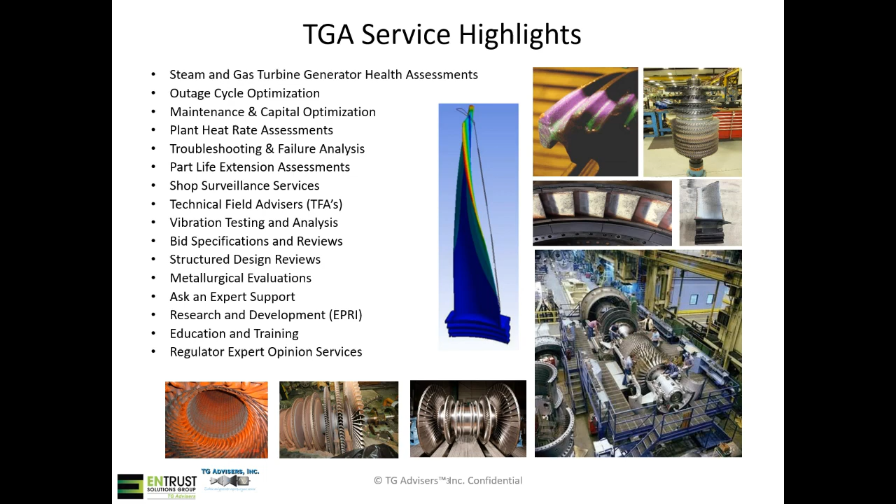All right, so now we're actually going to move into the startup optimization discussion. And really, I like to start with why optimize. First thing is we've had an influx of renewables over the last decade or more that has caused varying power demand and varying power prices throughout the day. So we've got wind turbines, solar, all types of other renewable sources that can be intermittent. So traditional generation sometimes has to respond to that demand.

Gas prices, natural gas prices have been fairly low over time here recently. So it is economical to run these combined cycle plants in many cases. But we do sometimes have oversaturated supply versus demand. So there's benefits to being able to cycle either down in load of these assets or to actually cycle them on and off. So we don't see a ton of baseload assets. I mean, you still see the nuclear steam turbines that pretty much come up to rated power and stay there, although there is some discussion on load cycling there as well.

But we do have quite a bit of variety of age of assets out in the market. And what you have is some of these older steam turbines competing, whether they've just been around since the 50s, 60s, 70s, 80s, even with these newer combined cycle units. You also have some units that have been repowered from conventional boilers to combined cycle arrangements. So some of the steam turbines still operating are from the 50s or 60s, and they're being forced to compete in competitive markets with plants that were more designed for cycling and are much newer. So we've got to somehow be competitive, but also make sure that the equipment is safe.

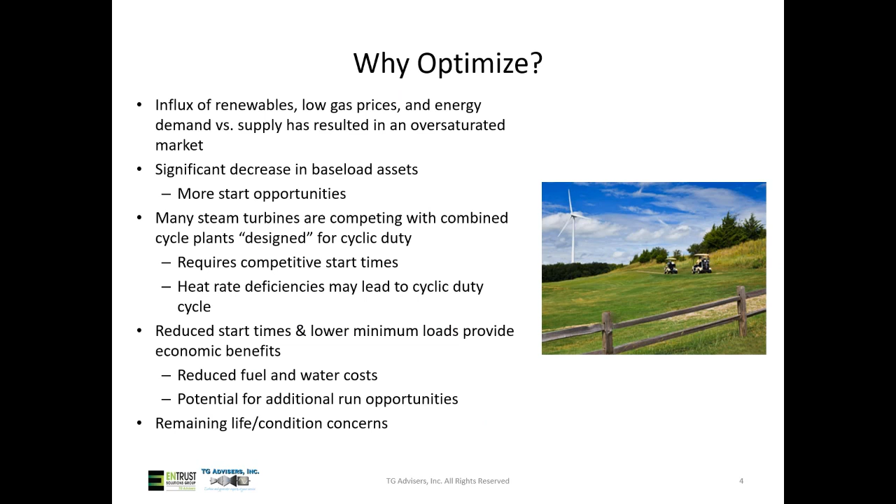All right, so we'll start with technical considerations. Really, the purpose of this section of the webinar is that when you go back and look at your steam turbine startup process, you'll start to understand a lot of the why behind some of the requirements that you adhere to through that process.

So let's start with what failure modes we're concerned with. When we're cycling on-off, we're going from basically no speed up to rated speed, which often is 3,600 RPM in the US. Nuclear could be 1,800 RPM, or any speed if you have a geared drive. The point is, you're going from standstill up to speed, and eventually back down to standstill. So anything that rotates experiences a significant stress cycle, and you can only do so many of those before a crack would initiate.

The second thing happening is we're going from cold or lower temperatures to a very high temperature. So we also have thermal stresses for all parts, whether rotating or stationary. Doing this a number of times eventually leads to what we call low cycle fatigue cracking - cracks forming in rotors, blades, casings, generator components, you name it. They're all exposed to stresses. We can also see stuff like solid particle erosion - particles kicked up from the boiler or HRSG when cycling, sent through the inlet of the steam turbine, causing solid particle impact damage that wears away surfaces over time.

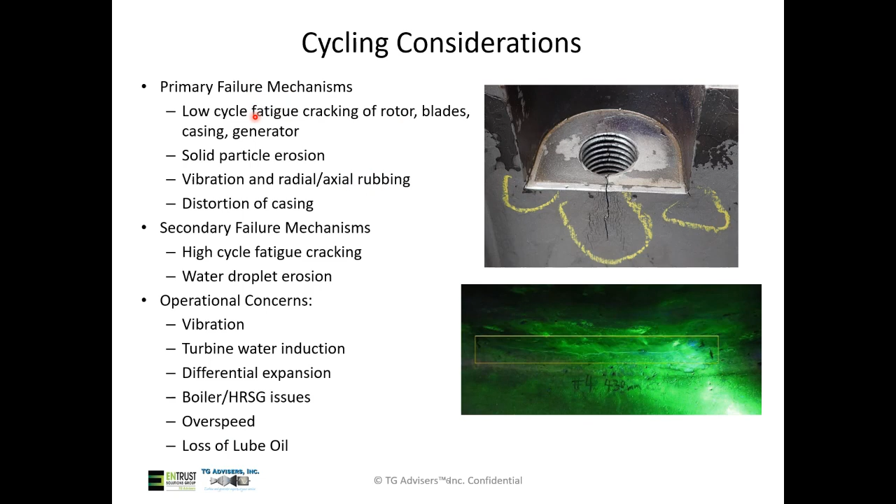I alluded to earlier that we have quite a bit of differences, quite a variety of steam turbines still out there operating. I'm going to put them today into two categories, the first being vintage. We've got to be very careful with these vintage units still operating because they're nearing their design life. For the high pressure, high temperature rotors, that may mean creep or embrittlement concerns, solid particle erosion. We may have a rotor bow that's developed, and casing cracking. For the low pressure turbine, typically what we're worried about is stress corrosion cracking or water droplet erosion. So these are failure modes likely present that we're having to manage in that vintage unit.

They're also typically less modern designs. Most of the rotors have a bore down the center. Essentially, after the forging process, you would come back and bore out or machine out the centerline of the rotor to remove impurities.

However, having a hole in the center of your rotor increases the stresses, so we got to be very careful with those bored rotors. You've probably heard of boresonic inspections in the past, which we do on a routine basis to look for flaws on that bore surface or subsurface and to track the growth over time to make sure that we don't have any flaws of concern.

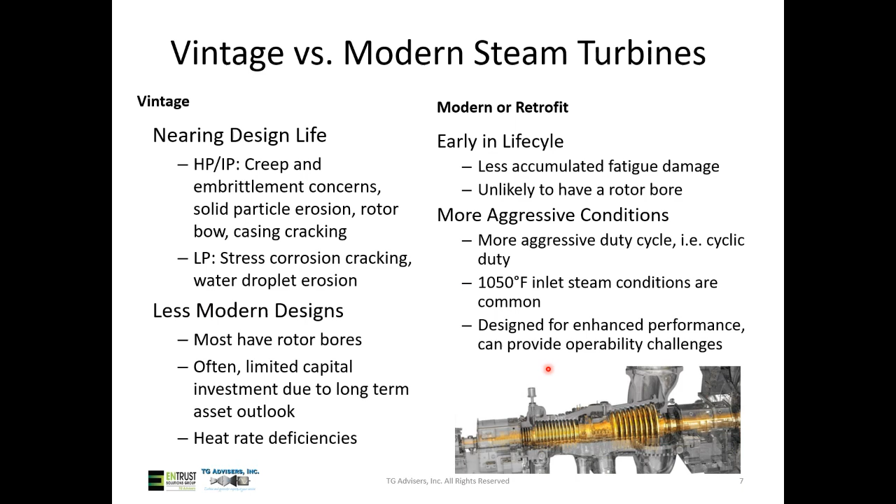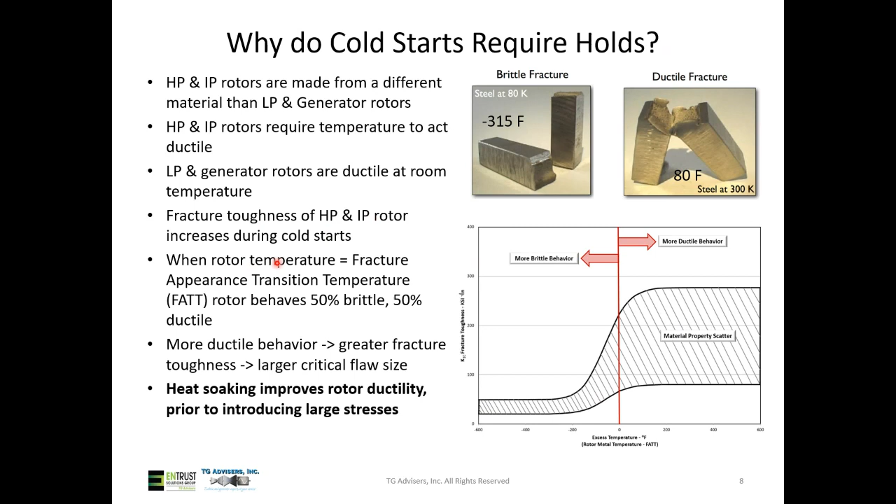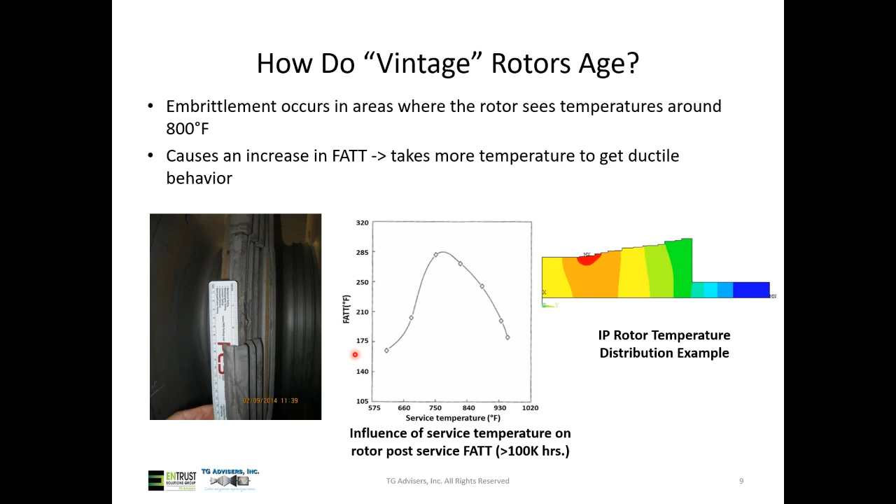The reason for that is, on most units, the last stage or the last couple stages of low pressure turbine blades are tuned. What that means is that we selectively control the mass and the stiffness such that their natural frequencies, the frequencies they're going to vibrate at, do not correlate to a multiple of running speed. If we have a blade vibration frequency that's equal to a multiple of running speed, the blade is going to fail rather quickly from high cycle fatigue.

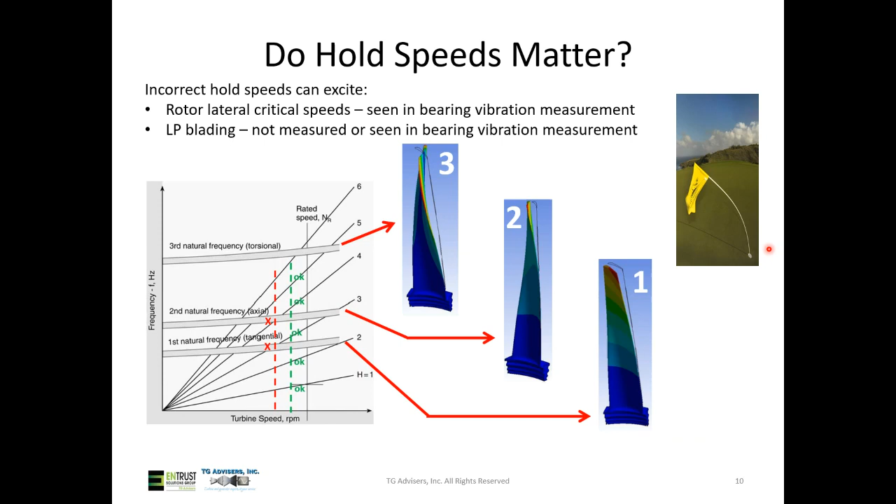Another important thing on steam turbine startups is steam to metal mismatch. Essentially, this is the difference in temperature between the steam and the metal temperatures in the unit. As you can imagine, the higher the difference, the more thermal stress occurs, because it's like taking something cold and pouring hot water into it. It's a significant stress cycle.

Another way to look at it: if you've ever taken a hot glass pan out of the oven and put cold water on it, it would just shatter. So we want to keep the steam to metal mismatch low to keep thermal stresses low. But if we don't have any mismatch, then we don't get any heating. So the higher the mismatch, the quicker it heats, but the more stress. We have to manage these things.

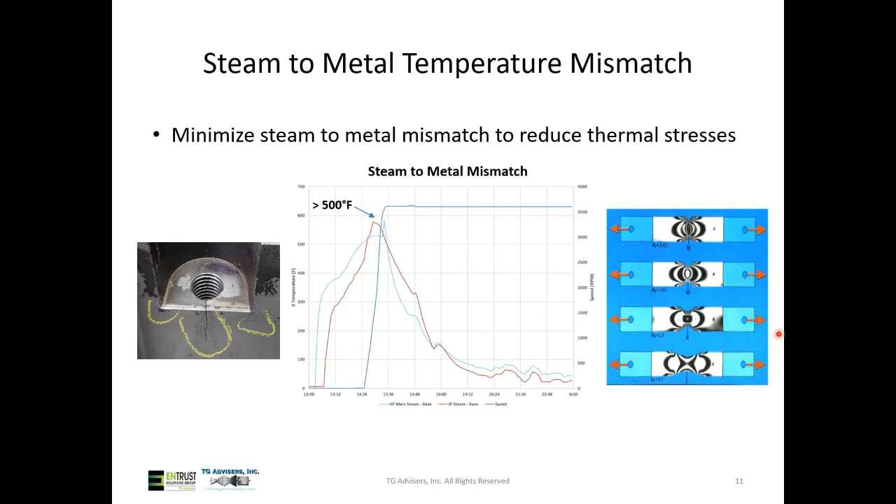We also have to be worried about clearances. So when you're going through an outage, sometimes there's a desire to make clearances very tight, particularly radial clearances, to try and get as much performance as possible and limit leakage in areas that don't contribute to power production.

However, that can present significant challenges with cycling. We want to be able to be flexible and start the unit quick, and if we put these tight clearances in coming out of an outage, we may not be able to start the unit because we're getting significant rubbing, or we may eventually rub out the seals or damage them and be right back where we were previously. So you certainly want to consider your approach in setting seal clearances in a unit that cycles.

That's one thing - axial clearance. We're going to have differential expansion because everything heats up differently. Rotor, casing, rotor length is also impacted by heat, but it's also impacted by speed. So a lot of stuff going on. We don't want things to touch that aren't supposed to - metal on metal can create quite a bit of damage. So making sure we have sufficient clearances is important for cycling.

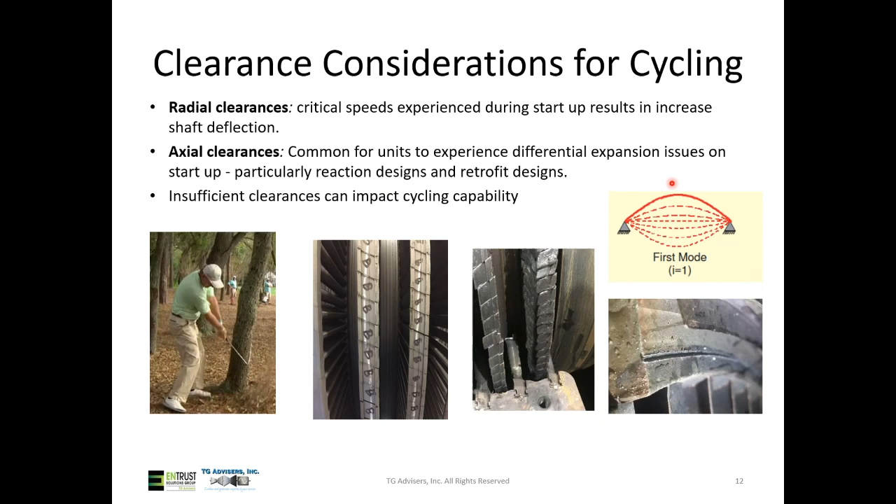All right, so now moving a little bit more into startup parameters, and it's quite a bit going on. Why there's a lot of issues during this time is that there is so much going on and everything's changing. A lot of steam turbine startups are still manual or semi-manual. Some cases they're automated. Gas turbine startups tend to be more of a push button.

So what are some of the stuff we're looking at just to be able to roll the turbine? We're looking at superheat requirements. We want to make sure that the steam is superheated enough such that we don't get wet steam in areas that we don't want it.

We need to make sure that our steam lines, piping leading up to the turbine is warmed up. We're going to look at rotor eccentricity to make sure that the shaft has all the temporary wobble out of it, such that we don't get too high of vibrations when we run it up. We're going to look at lube oil temperatures as well, to make sure that the oil is warm enough such that we get good vibration dampening from the bearings and the oil film.

We're also going to look at LP condenser vacuum levels to make sure that we have appropriate vacuum levels to bring the unit up. We have to be very careful with vacuum levels throughout startup to prevent potential blade vibration issues in the LP, low pressure turbine.

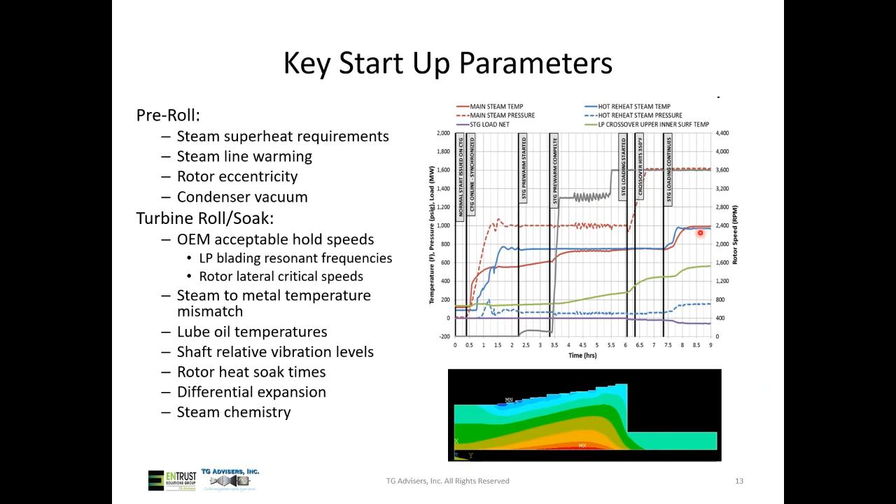So phase two goes from rolling off gear up until we put some load on the machine. And then the third phase is loading of the machine, going from closing the breaker up to eventually the dispatch megawatts.

All right, so I think most of you joined this webinar to understand what you can do differently. So a couple things I want to highlight here, or some of the opportunities. I look at this where we have a lot of different knobs and buttons, and depending on the unit, we do different things. So the first thing is we can change steam conditions potentially, temperatures and pressures.

So we can reduce the roll temperature, which has a benefit for thermal stresses. We're going to have lower steam to metal mismatch, but we do need to make sure that the steam is still hot enough to provide rotor heating.

We can look at putting steam into the unit quicker, which is going to shorten our startup process and get us rolling faster. We just need to make sure that, again, we have good superheat such that we're not putting moisture into the unit where it's not designed to have moisture.

If you've got a steam seal system or an auxiliary source of steam, you can use that to preheat the rotor. I'll show you some examples, both analytical and in practice, of the benefit of that. So we found, if you're in a day ahead market, you're going to be called and you have the ability to put those steam seals on, go ahead and do it. It gives you some free heating and allows you to make the startup a little bit quicker and safer.

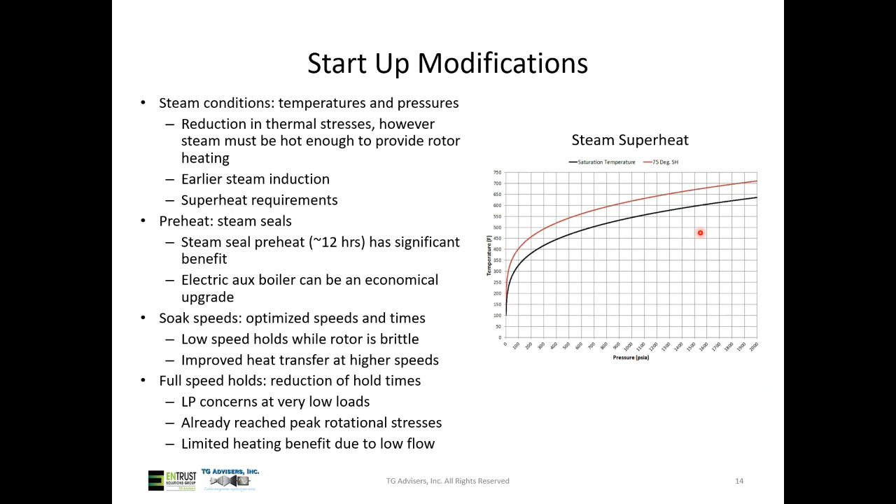So I mentioned the steam seals. Here's an intermediate pressure rotor, and what's interesting is here's the inlet, right? And then here's the exhaust and the gland or the steam seal area. So what's interesting is that the slowest part and the limiting part of the rotor to heat up is going to be this back end typically, because the steam is coming through the inlet and it drops temperature, drops pressure by the time you get back here.

This is also the thickest part of the rotor, so it's going to heat the slowest. Well, if I can put those steam seals on in advance, it's essentially putting some heat to the back end of the rotor, and that's going to start to conduct through and give you some heating benefit from the back end first, which is the part that heats the slowest when I actually start rolling up the unit. So it's a good way to cheat and get some free heating in advance of actually rolling.

So what we're showing over here is just some modeling, and the biggest benefit is at stage 7, the back end. Limited benefit kind of up front, but that's okay because that's going to heat the quickest once we actually admit steam to the unit. So if you're on a day ahead market and have an aux source of steam, go ahead and put the steam seals on. Typically 350 to 400 degrees Fahrenheit is kind of the temperature range that we see, but we've seen lower, we've seen higher.

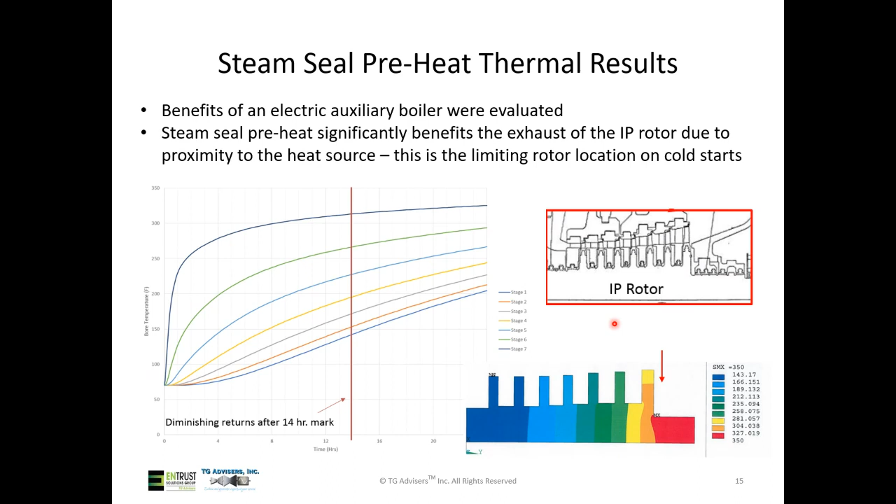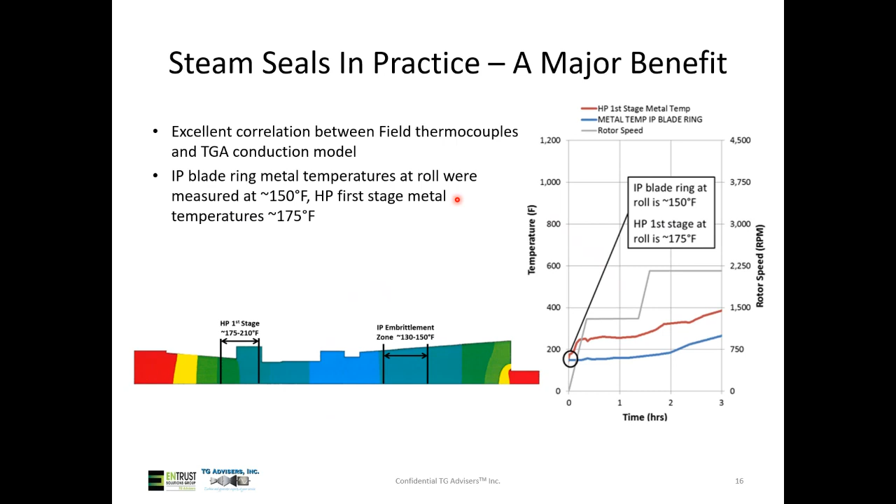So when we start to look at the startup, now we're getting more into the actual evaluation part. These are the things you want to look at and understand. First thing is operating hours and starts. What have we accumulated? It tells us how many failure modes we're probably dealing with at this point and how far they may have progressed. Are we close to the end of life or do we have a lot of life left?

We'll look at historical outage reports, specifically the non-destructive evaluations. If you have a bore, you want to understand the bore condition. Ultimately, what you do is something called fracture mechanics calculations, looking at the flaws that exist and what a critical flaw size would be, and then you can calculate how many times you can cycle it to grow that existing flaw to a size of concern.

If you don't have a bore, you may have a peripheral UT where they look from the outer surfaces inwards, again, to look for flaws internal to the rotor.

We can develop a good finite element analysis model, which allows us, with your operational data, to calculate rotor temperatures throughout all of startup, and rotor stresses throughout startup as well. From those, combined with knowledge of material properties and behavior, we can calculate critical crack sizes throughout startup. This allows us to understand how conservative or anti-conservative a startup is, and it allows you to set a baseline so that when you modify things, you can quantify the improvement.

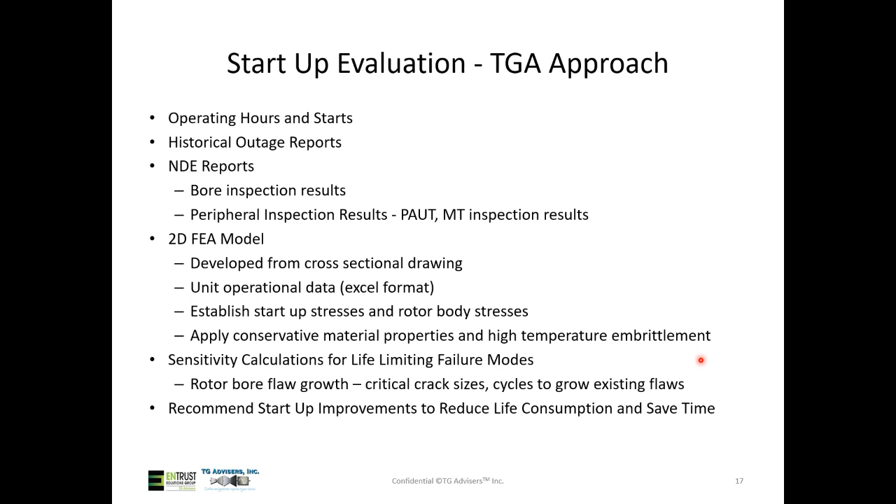We call it PI data, because that's what most folks use, but operational data is exported from a real turbine startup from your unit. We make a finite element analysis model of the rotor and simulate the startup on the computer. We can simulate changes, and what we're looking at is stresses throughout startup, particularly on that center line or bore surface, and temperature throughout startup. With temperature, we can figure out material properties throughout startup.

Remember, one of the first things I said is that the material properties for the high temperature rotors change throughout the startup. It starts brittle and transitions to ductile behavior. So we've got to incorporate that knowledge as well.

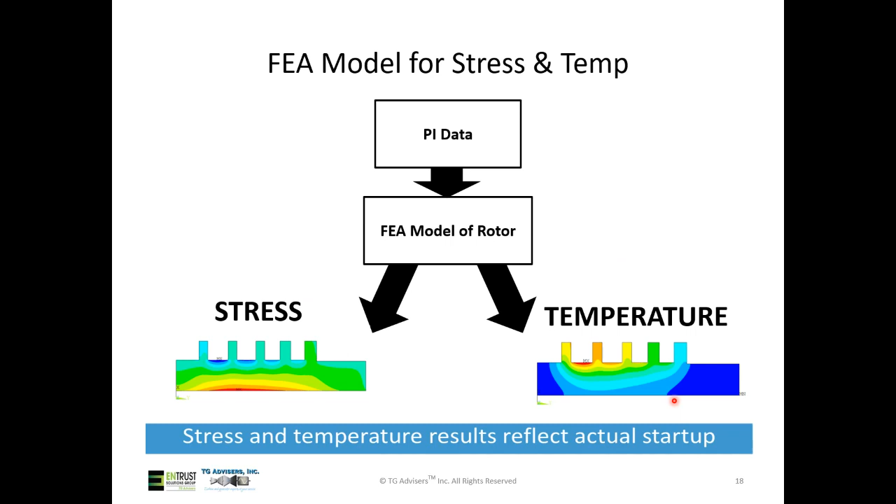Here's an example of an HPIP retrofit optimization. Really, the takeaway on this one is going to be the pre-warm period.

Depending on the OEM and depending on the vintage, you may have a process called pre-warm by pressurization, or pre-warming. What this does is pulse in steam. We can't just admit significant steam into the casing because then the turbine's going to roll off gear. So we just pulse steam in and get this slow, gradual heating over time.

The problem is if you follow this process to the T, you often end up with a very slow process. In this case, they had to get to 350 degrees first stage HP metal temperature, and it took roughly 10 hours of this steam pulsing to get there. So when you look at it, if you cut off this final 4 hours, the difference is only 50 degrees of benefit. So you get diminishing returns with time.

If we were to roll up to a low speed hold, we would get better heat transfer, a little better flow, and a little bit quicker heating. So there's ways to modify that and cut back on the time without compromising the safety of the unit.

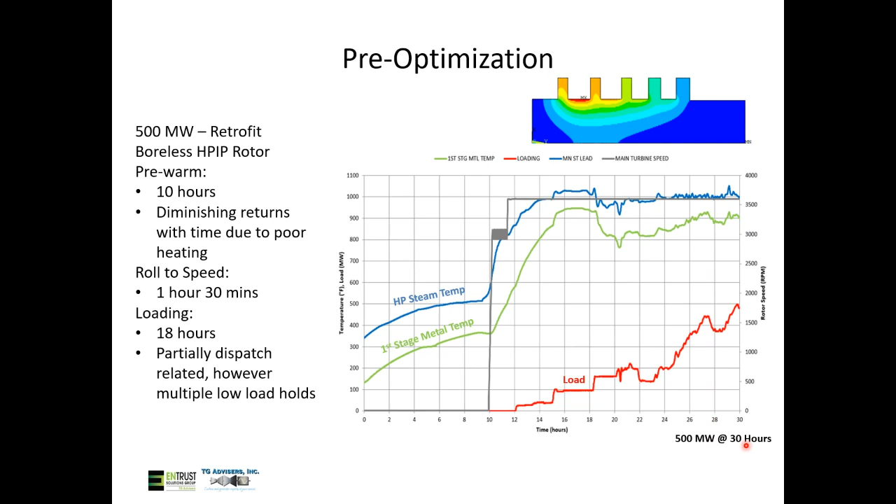But again, some of it was driven by dispatch requirements. So even if you look at it 20 hours versus 10 hours, it's still a significant savings. And we haven't compromised the unit in any manner.

All right, let's talk a little bit on vintage optimization. I think this is wrapping us up here as our last case study. Just some pictures I grabbed from the web.

This is more of a vintage unit here, high temperature, and then low temperature, transitioning into low temperature. Here we're showing some borosonic equipment and some visual indications on a rotor bore.

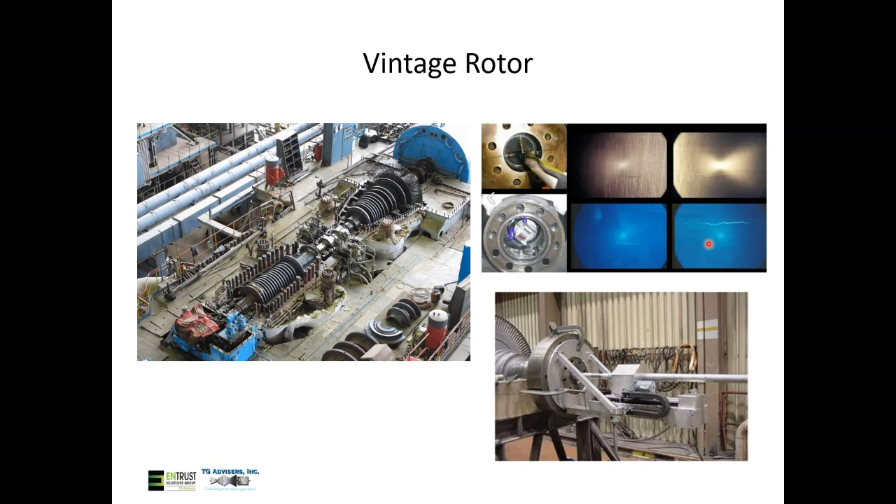Again, that's the surface that was cut out on the center line of the rotor following the forging process. Sometimes you'll even see a bottle bore if you look at your bore diameters, because there might have been a flaw like you see in these pictures, and then they would have come in and machined that out, and it ends up increasing the diameter of the bore in a section, which we call a bottle bore.

So I know these plots have a lot going on, so let's take a minute and explain them. These are coming out of our rotor models for optimization. So what we're looking at

here is stresses at the bore. So if you look up here in this top corner, it's the stress at the bore below each blade stage. So stage 9 is basically right here, 10, 11, 12, 13.

So using this finite element analysis and the steam conditions, steam temperatures, pressures, and speed ramp rates, I can simulate the startup. And what you see is with this startup, if you follow the speed, it comes up to 3,000 RPM. It wobulates. For those that know the various startups, you probably know which OEM this is. But then it goes up from 3,000 RPM right up to 3,600 RPM and starts making power.

Low load hold, and then picks up load eventually. So my question is why are stresses peaking so early on? And then you notice they're coming down, even holding at relatively constant speed. The answer to this is that we have two things happening at once.

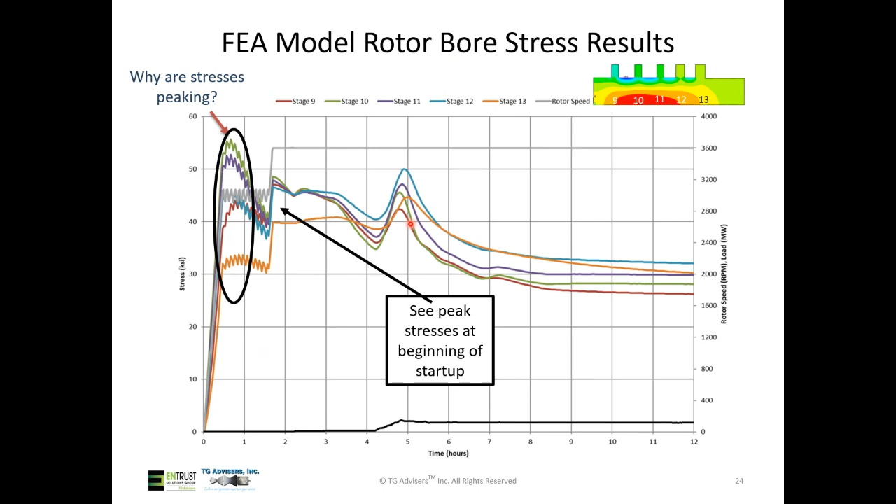Although I had that stress peak again around 5 hours, I have much larger critical crack sizes at that point. So I'm not at risk for failure at that point, which is why we don't like to spend a lot of time at that low speed hold, because if I was going to have an issue, it would have happened here.

So you learned a lot during this webinar, and the question is, what can I do to improve things? I know it's not easy to answer, so I'll give you the answer: I can add a low speed hold. What that does is allow me to sit for a period of time at a lower rotational stress, because stress is a function of speed squared.

So now I'm sitting at 1,000 instead of 3,000. During that sitting at that low speed hold, two things are going to happen. First, my steam to metal mismatch is going to come down, which lowers my thermal stress. Second, my rotor temperatures are going to improve, which improves my rotor ductility or material properties.

So adding this half-hour hold at 1,000 RPM took my limiting critical from 0.2 inches up to about half an inch. Significant improvement with that little tweak, and something that your startups, particularly for older units, come with. One startup probably looks pretty similar for like a 1950s unit up to like the newer combined cycles without bores.

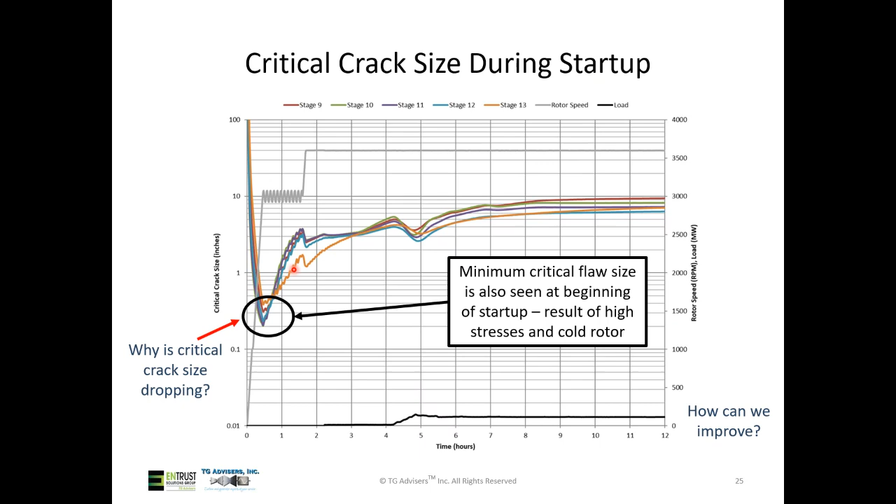So the science has improved, the understanding of fracture mechanics - that didn't even come out until like the 80s, so it wasn't around when a lot of these startup processes were developed. And the understanding of how rotors age has also improved with time. I think this is a great example of how adding a small hold and slowing down the startup in that one phase can significantly improve the margin on starting an older unit.

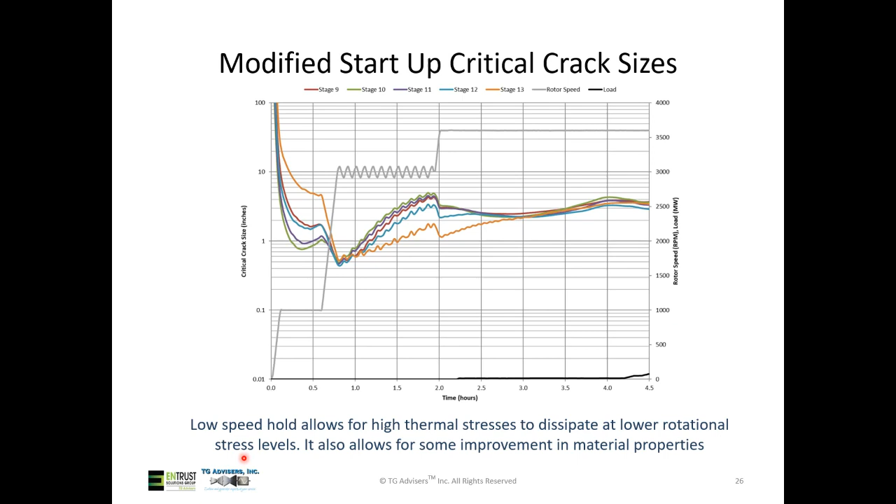Now we certainly could make up for this time elsewhere, like reducing the pre-warm or reducing that back end loading time when we've got good ductility, better material properties. So giving a little bit in this phase 2, run up the speed, I can get it back elsewhere and end up with a safer startup, but also still a faster startup. So the low speed hold allows for high thermal stresses to dissipate or reduce at lower rotational stress levels, and it also allows for some improvement in material properties.